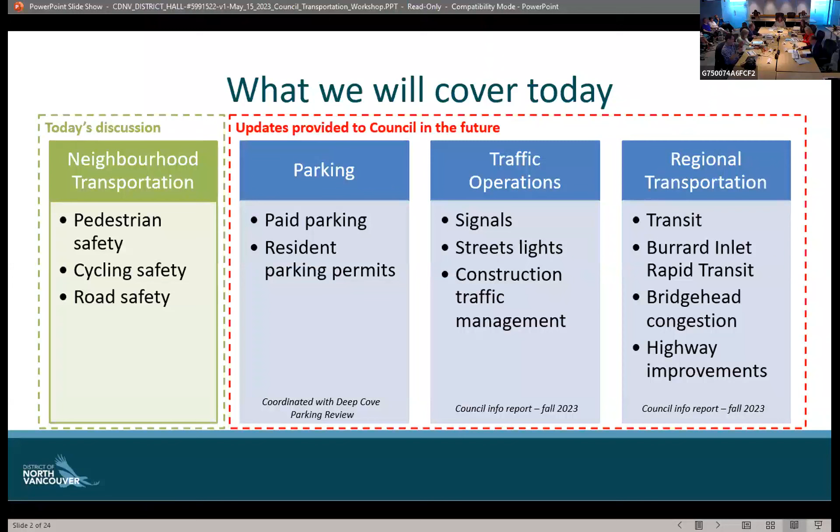Throughout this year we're planning to do updates. For example, on parking, we're currently doing a Deep Cove parking review, and there'll be an update to council later this year on that element. Traffic operations, we'll put together a council information report—this is more our day-to-day operations of traffic infrastructure. On regional transportation, Steve in his new role has a lot of great ongoing conversations right now, and we think later this year would be a better opportunity to provide an update on those elements as well.

Before we get into our first topic, I want to walk you through the structure of this evening. For each of the three topics, I'll present about 4 or 5 slides to initiate discussion, which will take 5 or 6 minutes. We'll then pause and talk for about half an hour for discussion, so hopefully there's plenty of time for council to provide input and feedback. I'll then move to topic 2 for a few minutes, back to council, and so on.

Under each topic, there are really 4 key questions or updates we'll be sharing. The first is, what have we been doing over the past few years? The second is, what are we planning to do over the next 4 to 5 years? The third is, from staff's perspective, what do we see as current challenges and observations with these programs? And lastly, in responding to those challenges, what ideas are we exploring?

That's really the focus of today's workshop—exploring anything we're throwing up on the wall as early concepts. Do they resonate well with council? If they do, and we can gauge your interest that it seems like a good idea, we can go away, further develop it, and then come back to a regular council session where it can be considered and formally adopted if there's sufficient support for a particular initiative.

So I want to walk you specifically through the structure for this evening. Peter, just a sec—Bethany, do you have a clarifying question on the structure?

I just wonder, in this workshop, are we not discussing neighborhood congestion or roads for automobiles? Are we bringing that back for another session?

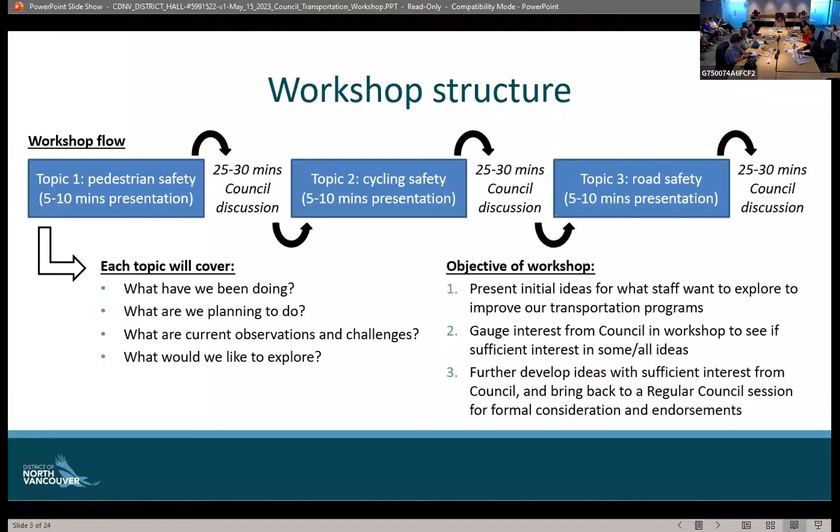So I'll jump to the next slide please. Before we go into our first topic, I'm not going to dwell too much on this, but I think it's important to share that over the last number of years, there's been a number of policies and plans defined and decided by council for staff to go away and deliver these action pieces.

On the left-hand side you see our OCP action plan that was adopted less than a couple of years ago. On the right-hand side, you see a whole bunch of policies, plans, and workshops we've been doing. We simply don't have enough time to go into the details, but it's important to share that we have guidance from council, and we will continue to have guidance from council as it relates to our transportation portfolio.

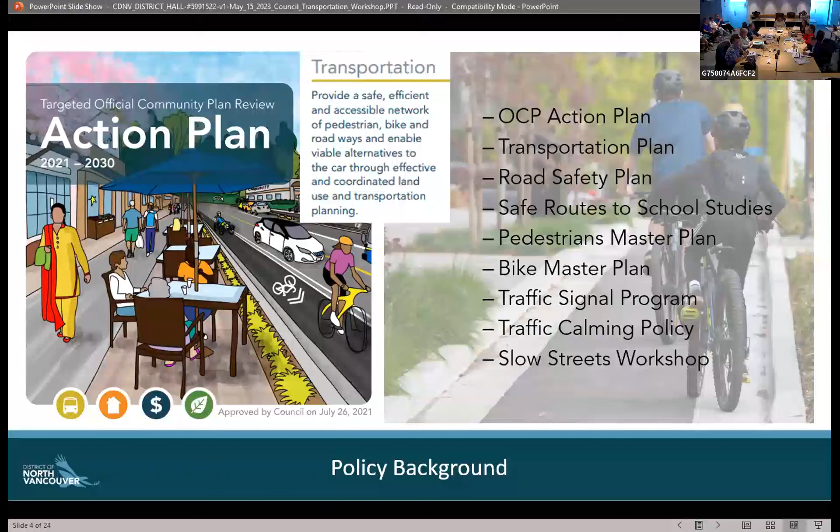Next slide, thanks. So let's jump straight into our first topic, which is in relation to pedestrian safety. Next slide, thanks.

So the first element of our pedestrian safety program I want to touch on is our Safe Routes to School. This is a program that looks at 10 different schools across the district, and currently we are 82% complete through this program.

This is a pretty broad spectrum in terms of what improvements we have within about an 800-meter distance from a particular school. They could be as simple as vegetation or landscaping trimming that's obscuring sight lines, improved signs and line marking, improvements to the 30-kilometer speed zone around a school, or localized intersection improvements. Across these 10 schools, the individual projects are in their dozens, many of them identified. But just to reiterate, we're currently 82% through this current program.

Next slide there, please. Thank you. Complementary to our Safe Routes to School program, we also deliver a number of additional active transportation projects across the district. This image here is giving you an overview of what we've achieved over the last 5 years.

What you see in orange relates to our sidewalk projects that have been completed. You've got a list on the top right-hand side as well. We also do a number of pedestrian improvements, and some of these, for example, are crosswalks. What's shown in green on the image represents some of those additional pedestrian improvements that we also do here in the district.

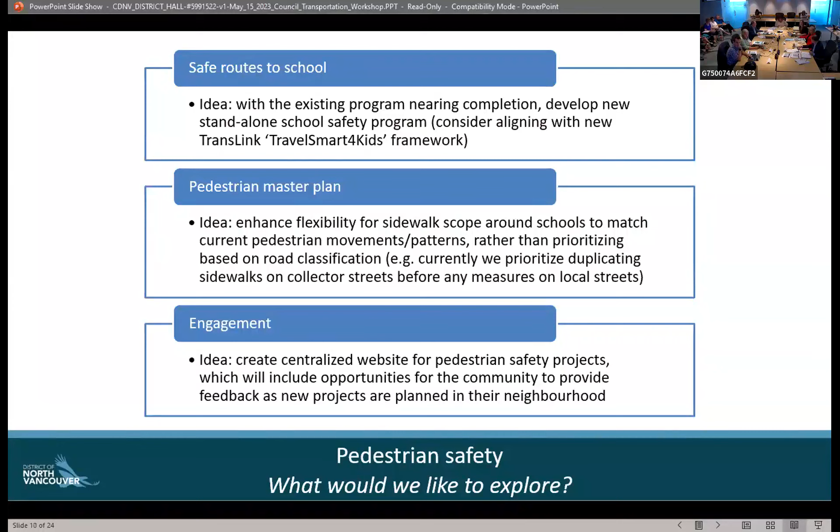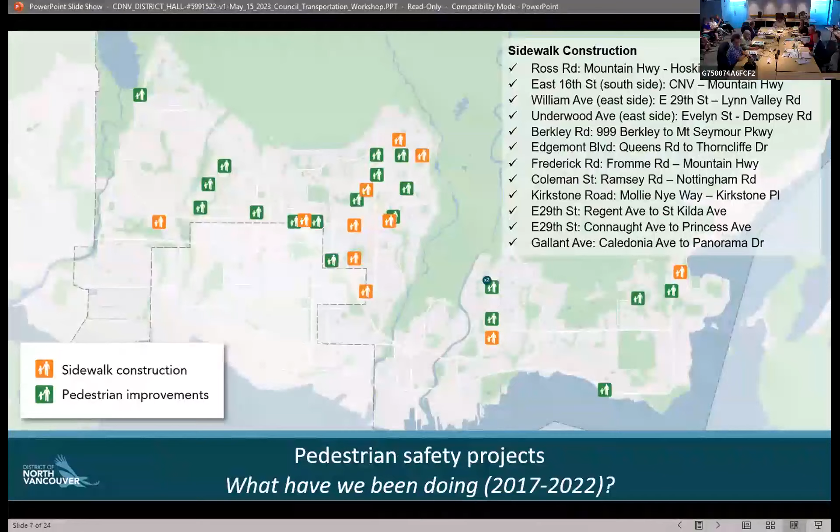Yeah, so they're part of our 5-year plan. Pemberton Heights, Norgate, and Deep Cove are the neighborhoods we're looking to come to over the next 5 years. We have an ongoing sidewalk program, so we go from neighborhood to neighborhood, identifying and working with that community for those sites. So for the next 5 years, there are 3 neighborhoods that we're seeing.

But why isn't Edgemont in there? We go through many neighborhoods. I don't know the last time we went into Edgemont. We might have to provide that update elsewhere, but those are just upcoming ones. It's not to say we won't be looking at other neighborhoods, but in terms of the next 3 years, these are the 3 neighborhoods next on the list to go to.

And if there are—because I recently did a walk with some of the residents around Edgemont and also met with the Edgemont Business Association, and there's clearly some issues going on, as I mentioned in my follow-up letter, that need addressing.

Some of them are safety issues. There's a daycare where kids walk back and forth on a street where nobody stops at the corner, even though there's a stop sign. I was there and saw it - a guy actually ran the stop sign the day I was there.

So what happens with those kinds of issues and how can they get prioritized? We get many of those. One theme you'll see in the road safety section is that the volume of requests we get is very significant, and we have a very limited staff base to work through a number of these issues. So we have to look at where the historical data is putting us in terms of the number of collisions, fatalities, or serious injuries. We prioritize those. We know from discussions and feedback from the community that they want to also explore outside of what the data is saying - I'm seeing this potential safety issue. I'll talk about that in the third section in terms of how we're thinking of responding to that need as well.

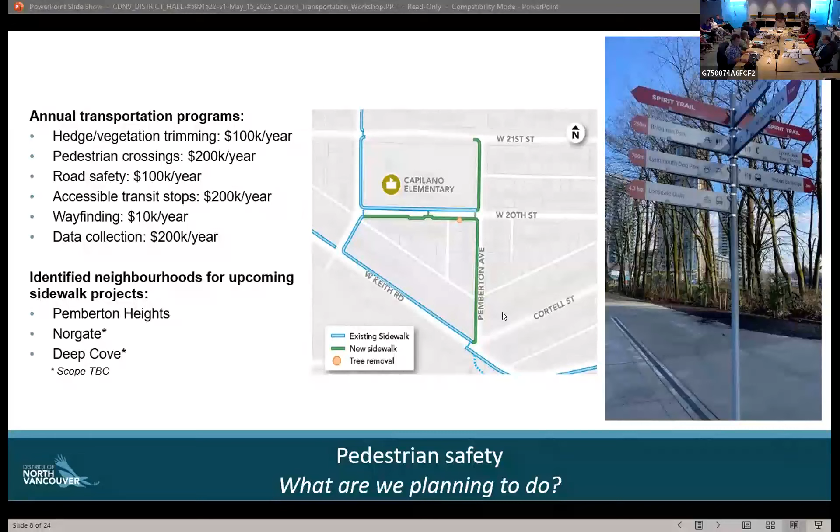Thank you, Councillor Hanson. Councillor Forbes: just a quick question. I'm back on page 14 where you've got the school program, and Canyon Heights is at 63%. That's already been mentioned, but Lynn Valley is at 67%. So is the future work going to be done in those two areas, because the bottom two, are they on your priority list?

Yeah, so it's certainly our plan to finish off the program. Some of the things left over may have a coordination element, maybe there's a project already coming down that we'll coordinate those improvements with. There could also be some adjacent development sites as well, again coordinating with that. But the goal, generally speaking, is to finish off this program in its full.

Well, I'm not so much speaking of finishing it off, as there's a couple of places that are really quite low compared to others, but I'm assuming the Lynn Valley one might be the one that Steve mentioned up by Argyle. If you consider these, is Argyle something that should be done?

It is going to be done, yes, soon. That is on schedule for construction this year. That specific improvement wasn't identified in a Safe Routes to School study, but it's something we're delivering through the pedestrian safety program, so there's quite a bit of overlap there. It could fall into either category, it's just that's the one most appropriate for our funding.

Thank you, Councillor Forbes. It's obvious we have a lot to say about this, we're 45 minutes in, and I know we have 2 extra questions and I haven't even said anything yet, and we still have 2 more sections. Mr. Stewart said we can do another one of these. It's going to have to come back sooner because we do want to address this, and if we're going to increase those budgets to get more of this work done, we're going to want to talk about this later. So I'm just going to insert myself here.

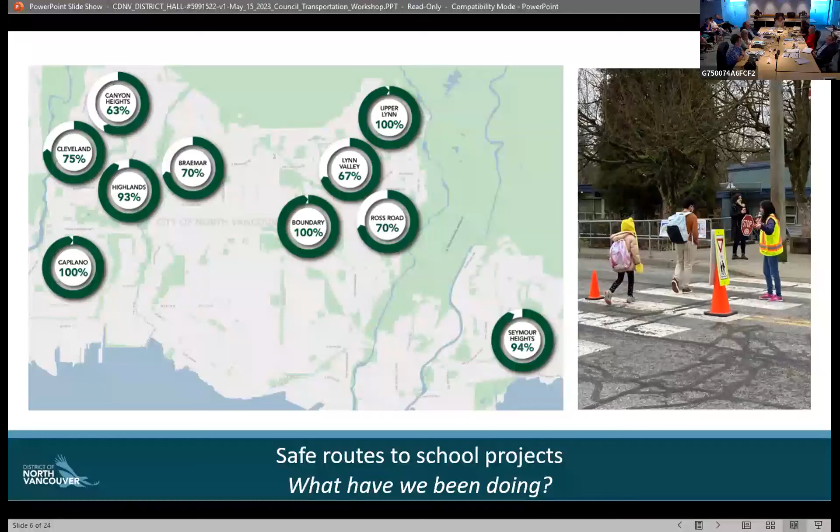Okay, so I know we all have more questions. I just have one quick one. On the Hansford thing, I just— but so does Counselor Back and so does Counselor Ma. Yeah, we have three really quick questions, but we have another hour, so we're gonna fit those into the next section. But I do want you to get to the next section, so go. Okay, yeah, we'll jump through.

There we go. So the second topic we're going to be talking about is the cycling safety program. For the next slide, please. So this image here is just to give an overview of our current plan and program of work we're planning to do.

There's two colors I really want to highlight here. The first, in yellow, indicates what is defined as council's priority routes—that's our marching order to move forward in building the backbone of a cycling network for the community, connecting town centres, regional parks, bridgeheads, and other key destinations. What you see in solid red relates to projects we've completed over the past five years, examples include the first phase of Lynn Valley Road active transportation improvements, and upgrades coordinated with the Ministry of Transportation's Lower Lynn interchange improvements.

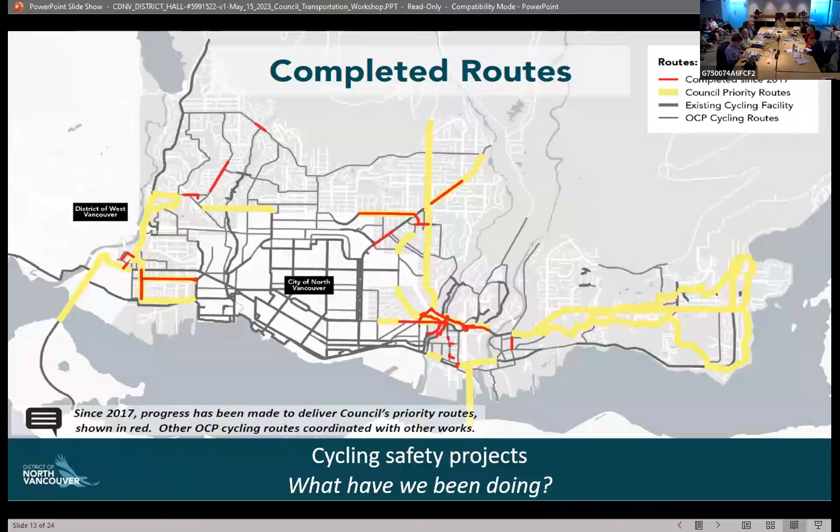Next slide, please. This slide builds off the past slide and gives an indication of the next four to five year plan for our cycling network expansion. Everything dashed in red continues to connect all of our town centres. Some example projects include filling gaps along Marine Drive at Main Street, the Mountain Highway Corridor, and phase two of our Lynn Valley Road active transportation improvements, where engagement starts tomorrow.

What you see in blue is just indicative—it's to give a representation that, following our budget discussions with council earlier this year, the Spirit Trail extension from Maplewood to Deep Cove is seen as a priority. Over the next four to five years we will find one route that gets you from Maplewood to Deep Cove. That is a very significant undertaking. I wanted to recognize this may not necessarily be the final alignment, but it's an indication that a big piece of our work program in the next five years is to look at that in conjunction with continuing to connect all of our town centres.

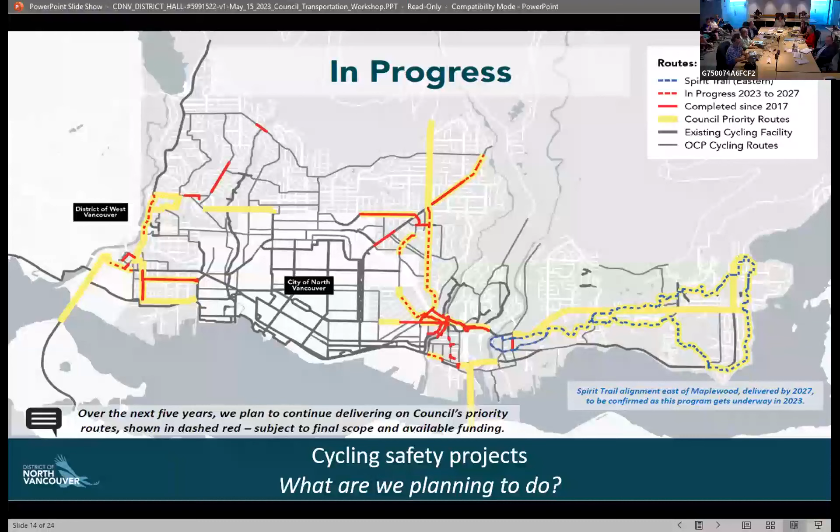Next slide, please. This is probably the slide I'll spend most time on for the cycling program. What we're finding as staff, and this is probably something you're also hearing from the community, is that we have a very clear vision in the OCP—we want to connect our town centres and key destinations—but implementing them is quite challenging. Gavin started to allude to this before.

There are four key areas we see very consistently coming up, whether it's discussion with council and the community, or feedback through our project engagement processes. The first area is really a desire to create dedicated space for cyclists, but also the competing interest of retaining some on-street parking.

So that's kind of more of a space allocation issue. The second one here is a desire to be delivering quicker in line with our 2030 vision, as opposed to really slowing down, engaging more, and revisiting some of our options that we're developing.

The third element here is that we do have a goal to be completing a minimum network, that backbone network that I was just talking about before. But without having that network, it is challenging sometimes for us to really prove what the existing ridership numbers are.

The last item is really to make cycling a competitive means of transportation. It's got to be having some direct linkages across our community. Given our topography and our road network, we really don't have many options outside of our arterial network, which is already moving a lot of people across different means.

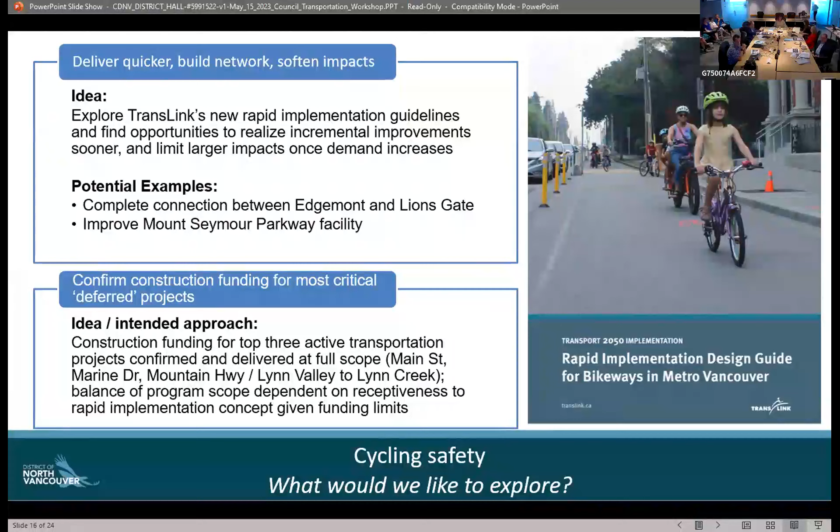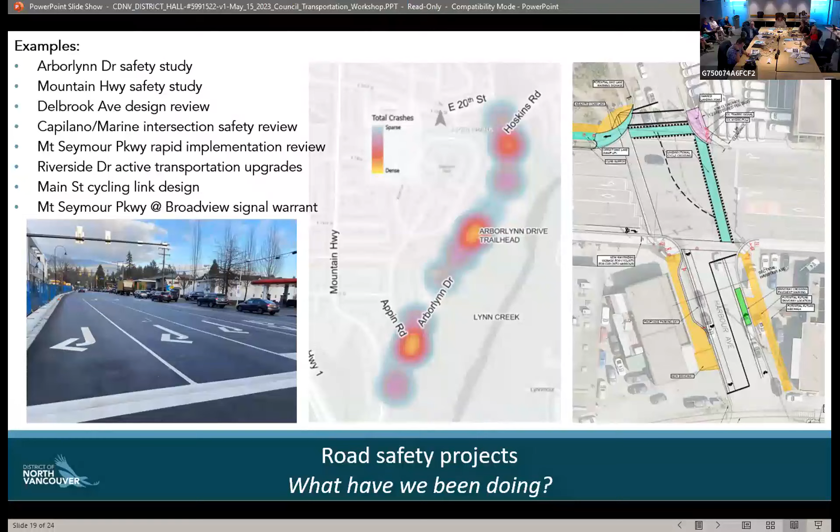This here is basically what we're planning to do. We will still continue exploring and implementing improvements to our high crash locations. What you see in terms of all the red spots, that's our high crash locations. So in terms of prioritizing my staff's time, we've got to pay attention to those areas for risk managing the district at specific locations. I won't go into more detail, but if we jump to the next slide, please.

This is kind of the key area in terms of some current observations and challenges that staff see. We touched on it at the very start here, and it's kind of layered its way through a number of discussion pieces.

We see really two key different areas that relate to road safety as a whole. One, engineering data - historically it says X crashes, we should do something about it if it's on the list. But the second piece, which is becoming more frequent from the community as well as council discussion, is a desire to look at traffic calming or road safety improvements for what could potentially be happening - there might be some speeding, or 'I feel unsafe at this intersection, can we explore doing something?'

Right now, based on staffing and funding, it's really challenging for us to do both. We get a little blurred trying to prioritize staff to fix known locations, but also starting to look at some locations that aren't at the top of our priority list. We know that type of feedback doesn't sit well with the community sometimes, but unfortunately right now we're just managing best with that existing resource.

Working through this slide, the third bullet point is really talking about traffic calming being really good in certain locations, and in other locations driver behavior change and encouraging that is also an effective tool. So while we get a lot of requests about traffic calming, things like enforcement, which we discussed this evening, and other driver behavior changes is another key tool in our toolbox. We want to explore that a little further as it relates to road safety.

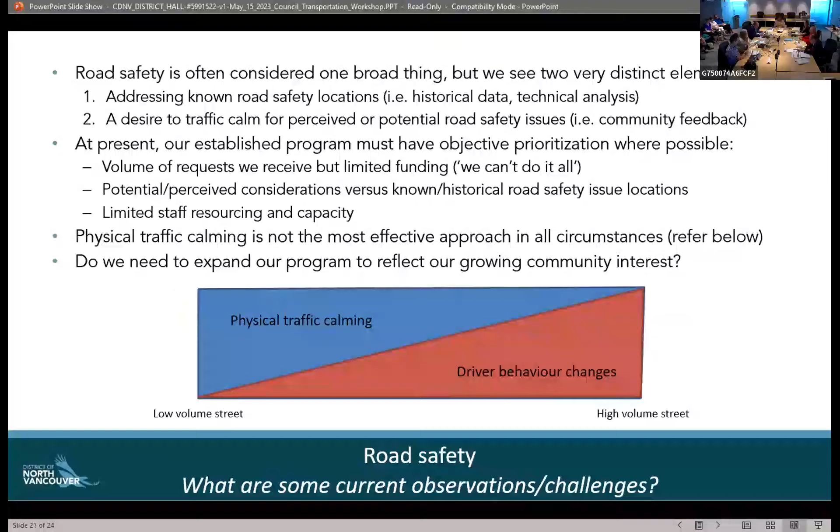Topic of road safety, and I found these high crash locations really interesting. Focusing on one that I know well, the Mount Seymour Parkway and Berkley. It is a high crash location, and I drive it every day. My belief is that it could be made safer through greater attention to the sight lines and clearing of some bushes in the median. I wonder if they've done that already, I think more could be done.

And same thing to some degree, I share Councillor Muri's comment about the light indicating a light change at Riverside and Mount Seymour Parkway, but I've actually dealt with car accidents on that intersection that involve different issues, again involving sight lines and driver perception, which is something I would highlight in terms of how accidents happen. I think it's possible we could go through each of these high crash locations with the perspective of how do drivers perceive these locations and what are the errors in their perceptions. How are things like bushes, signage, lines on the road? There may be other things we can think of to improve driver caution through these intersections. So I just wonder what your comments on that are.